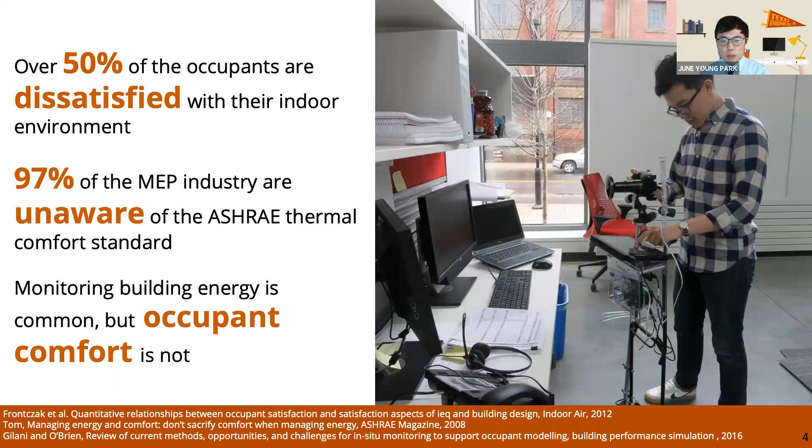But in fact, that's not always true. This is a photo from my research assistantship at Carnegie Mellon University. I traveled around US government buildings using IAQ sensing and interviewing people to evaluate their satisfaction with their buildings. No matter which building, what I learned is they always complain about their building systems and indoor environment quality. And that's absolutely true from other POE studies, from industry standards or technological points of view. The main reason is that humans are not in the control loop. Sometimes they deactivate the sensing system or the sensors are located in the wrong way. One example: they use static set points for everyone, even though everyone has different preference levels.

So my PhD dissertation tries to review the articles to understand why this kind of problem happened. I reviewed research articles from human behavior, comfort, and smart building control research during my first year of PhD.

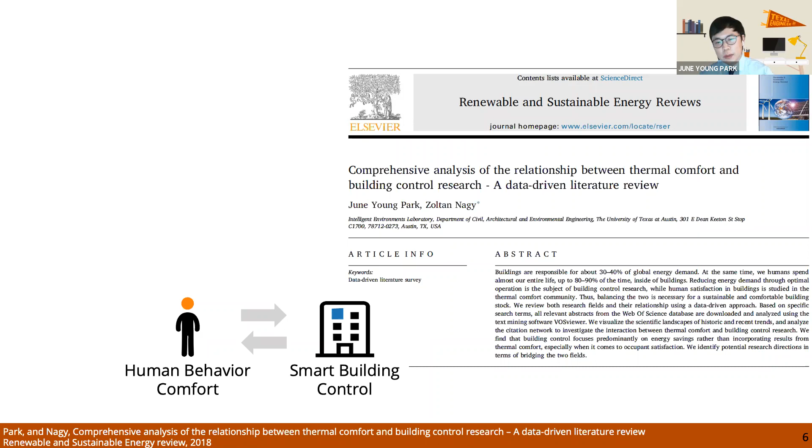Individually, both human behavior and comfort research, and smart building control research, show huge developments, especially after 2010. There are a lot of numerous papers published out there. So if there is knowledge transfer between the two, then there shouldn't be such problems as I identified before.

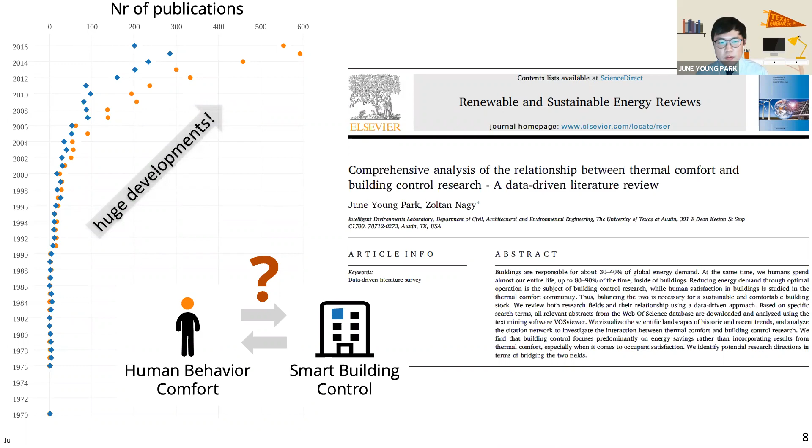So I tried to analyze the relationship between those two fields using a text mining technique. Each dot here represents how researchers use those scientific keywords in their scientific articles. And the distance between the two bubble dots represents how the two keywords co-occur in the same document.

Obviously, the keywords related to human comfort on the red side are far away from the keywords from smart building and building control research. That means they're not co-occurring in the same scientific article documents. That also means researchers from the smart building field, including me, are predominantly focusing on energy efficiency rather than thermal comfort or human comfort considerations.

So my PhD dissertation tries to link those two fields using some keywords. These keywords kind of hinted to me how I can tackle this problem, and they popped up in this bubble diagram as well. Context-wise, they are occupant adaptive behavior or indoor environment quality. Methodologically speaking, they are machine learning, intelligent controls, and environmental sensing.

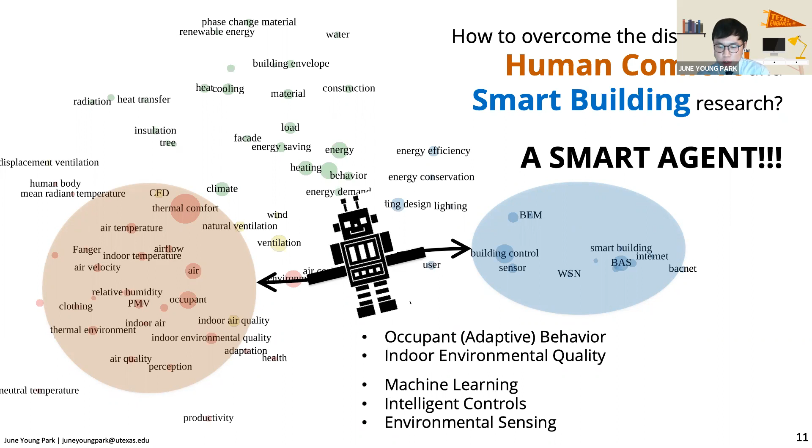So the prime example of this, the OCC agent, is occupant-centric building control, which is actively studied in IEA EBC Annex 79. Under this paradigm shift in building control, the OCC agent acquires data from occupants using indoor environment or human-building interaction devices, and updates the building control set point for building systems to provide comfort. The main objective here is balancing occupant comfort and energy efficiency, which is considered one of the grand challenges in building control and thermal comfort field.

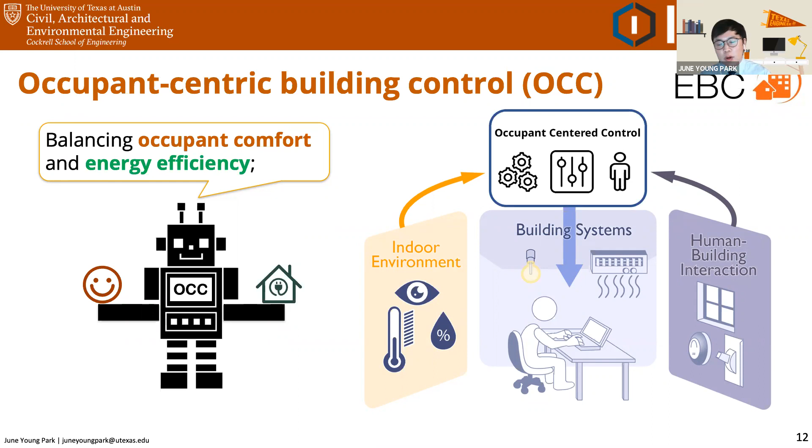So as part of Annex 79 subtask 4, we started to review OCC studies. Using keyword searching, we found that there are more than 120 papers on OCC studies. But in fact, there are only 42 field implementations in actual building systems, which indicates there are some practicability issues when we apply OCC to actual buildings. That requires easily deployable, doable OCC algorithms in actual building systems.

Among those 42 studies, 23 are occupancy-based controls, which identify occupants' presence or count the number of occupants and use that information for whole building systems control. There are also 19 occupant behavior-based controls, which identify different preference levels or occupant behavior patterns and use that knowledge to identify adaptive and personalized set points.

Among those 19, 13 are direct sensing of occupant comfort, using biological sensing or app-based questions about comfort. And 6 are indirect sensing, which just observe how people use their thermostat or light switches, analyzing diurnal patterns to identify the comfort boundary of each individual.

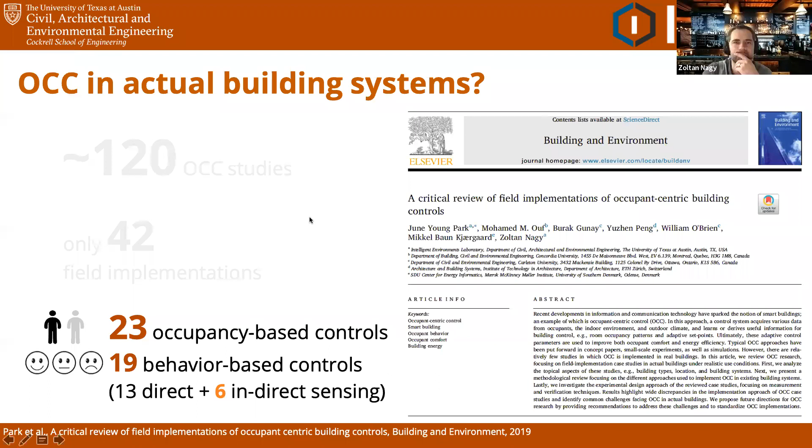Study 1 is related to occupancy-based control. The name is CRC-OOD. I'll detail the name later on, but I want to point out that this is a direct quote from Annex 79 subtask 2. I'm applying advanced data analytics on existing data sources to identify the fundamental knowledge between occupants and their mobile devices, which can be used for occupancy-based control.

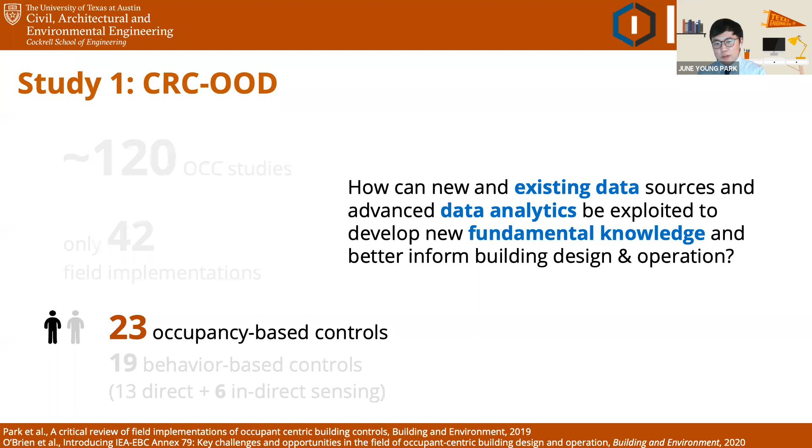Study 2 is RL-OCC, reinforcement learning-based occupant behavior-centric controls. This is also a direct quote from Annex 79, subtask 4. I'm going to develop building operations strategies using online learning methods to adapt to occupants and provide a comfortable environment using less energy.

Here are the contributions of this dissertation. The first, CRC-OOD, is capture and recapture based opportunistic occupancy detection—building a simple and accurate detection system using existing IT infrastructure data, inferring the number of occupants with minimal ground truth information, and identifying the fundamental relationship between occupants and their mobile devices. The second, RL-OCC, harnesses the complex dynamics of human-building interactions by observing diurnal patterns of people using building systems. It uses online learning to continuously adapt building systems to humans, ultimately balancing occupant comfort and energy saving efficiently.

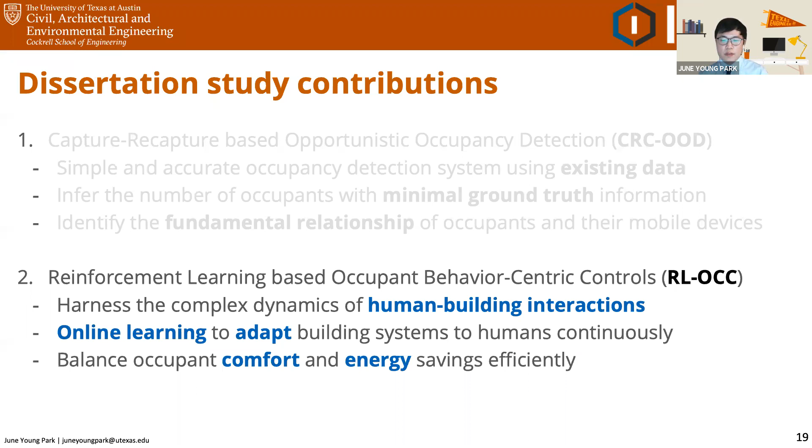Here's a graphical abstract of my studies, CRC-OOD and RL-OCC. CRC-OOD uses IT infrastructure to identify the fundamental relationship of occupants and their mobile devices using the capture and recapture technique, for more whole-building level analysis. On the other hand, RL-OCC is for closed office units, individual people, trying to understand their preferences or behavior, linked to lighting control, HVAC control, and the BAS system using reinforcement learning technique.

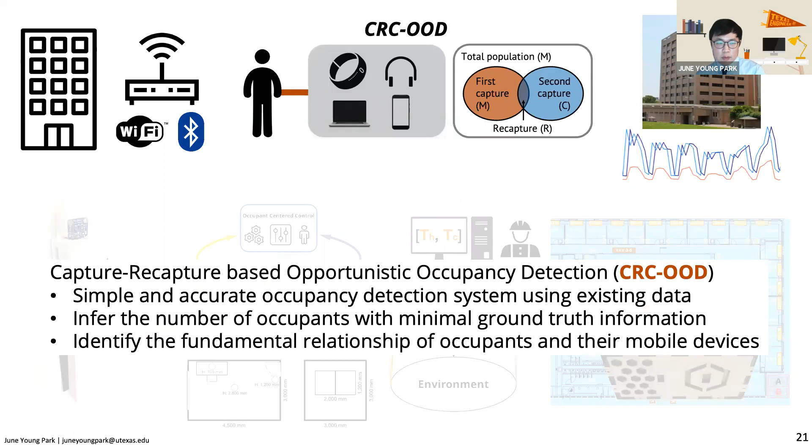So CRC-OOD—just reiterating my previous point—researchers these days use opportunistic occupant detection, meaning using existing data sources to infer occupancy or occupant counts. That's because people carry Wi-Fi or Bluetooth devices in their daily life patterns, and we have IT infrastructure to use that.

But there is a missing link behind this opportunistic occupancy detection. Most models researchers propose for occupancy-based control require a Y label, the number of people, to train the model in a supervised learning fashion. But to get this Y label data requires camera installation to count people, which has privacy issues, is expensive, and isn't doable for all buildings. It's also labor intensive by manual counting, and as time goes by, people have to recalibrate those labels to retrain the model again and again.

So instead, I was trying to infer the more fundamental relationship between people and their mobile devices, which is R here, mobile devices and N people.

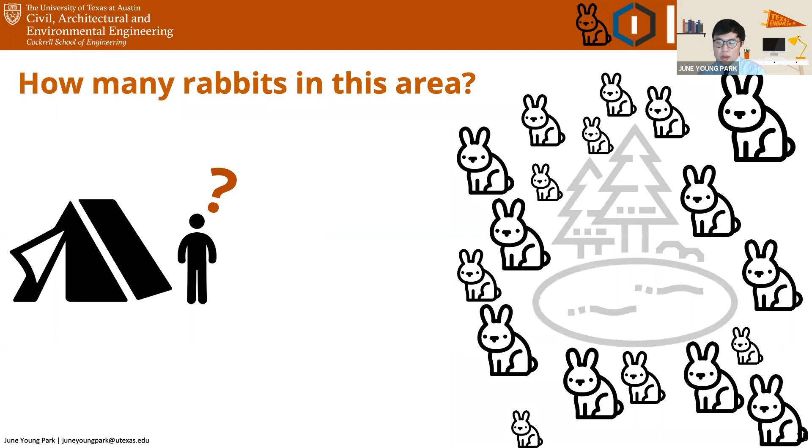Here I introduce one interesting method from ecology. When ecologists try to estimate the total population size of certain rabbits or certain species in an area, they use the capture and recapture estimator. It is an established method with a very long history.

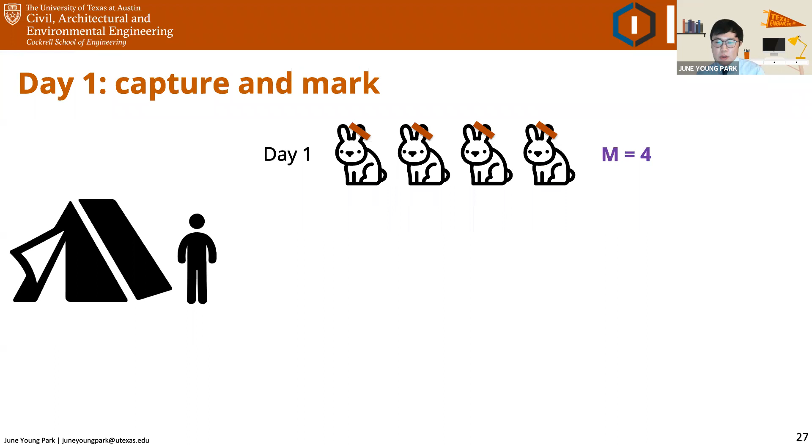One person goes into the area, counts the number of rabbits, marks their ears, and releases those rabbits on day 1. On day 2, they capture new rabbits, and among them 3 are actually recaptured from day 1. By analyzing those patterns of capture, recapture, and new capture—MCR—we can estimate the total number of rabbits from an ecology perspective.

We apply this technique to the building domain, especially for Wi-Fi and mobile devices. On day 1, we capture 3 mobile devices and store their MAC addresses, the unique identifier of each device. On day 2, we get 2 new devices, and just one device is recaptured from day 1. If we continue this to day N, we get a generalized format, the Schnabel index, to infer the total number of mobile devices in the building. If we divide this number by the whole registered population in the building, we can infer RCRC, the ratio we want to identify.

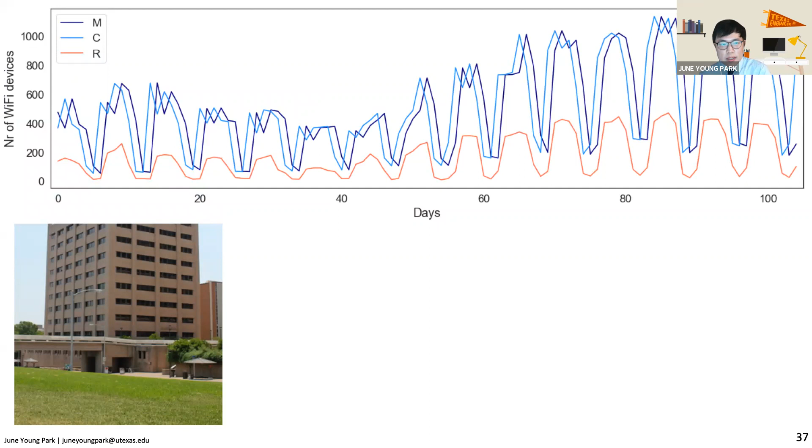We apply this CRC-OOD in actual buildings. This is the ECJ building, home of the CAEE department, with about 1,300 people registered. This shows 100 days of MCR patterns. Applying our technique, we identify 1.42 Wi-Fi devices per person.

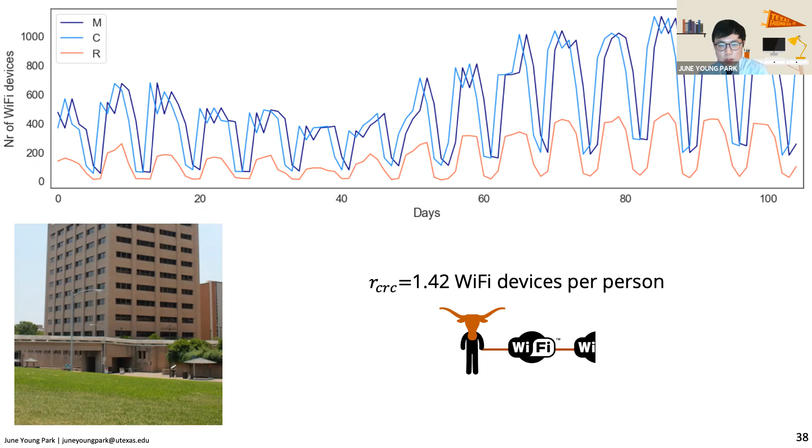We also apply this technique to other buildings. Every building has a different story in terms of MCR patterns, resulting in different R values. That means we cannot use a simple R value for every building, because each building contains different populations with different ratios of mobile devices. CRC-OOD can adaptively learn different R values based just on IT infrastructure data.

But one limitation was evaluating those numbers using ground truth data. So we used simulation to evaluate CRC-OOD in a simulated environment. In this case, there are 1,000 people, and we changed the R ratio—the ratio between people and mobile devices—from 0 to 3.

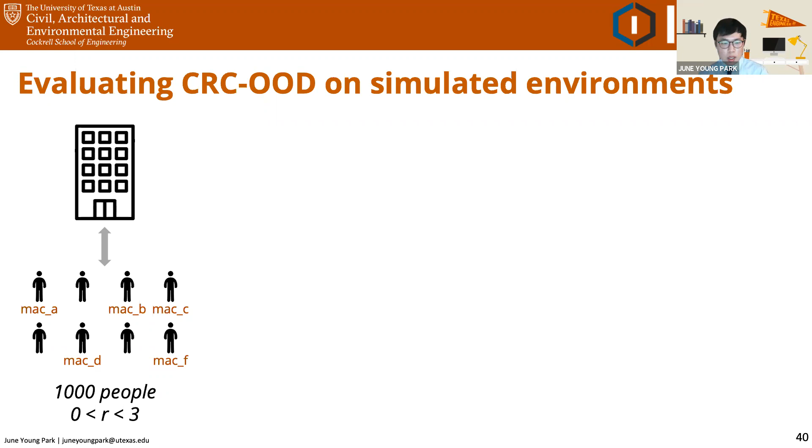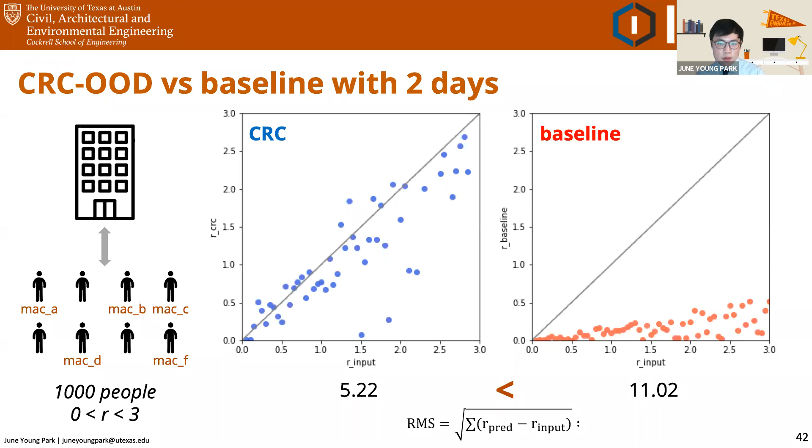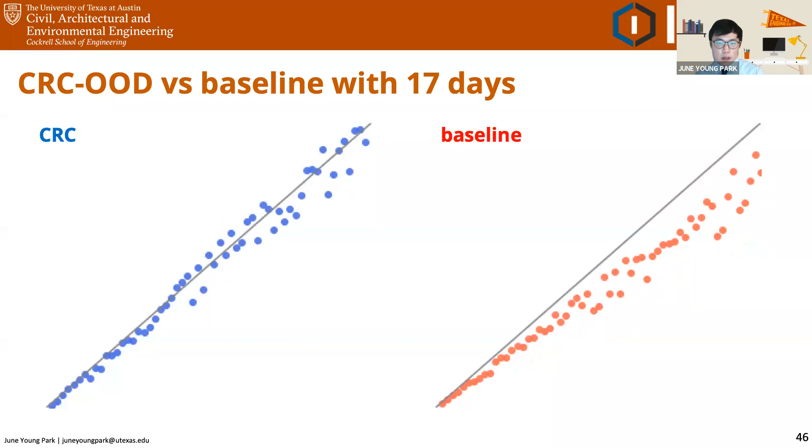Using just 2 days of CRC, the results are very close to the y equal x line, which is way better than baseline in terms of RMS rate. This is 2 days of CRC, 7 days of CRC getting close to the y equal x line, 12 days of CRC, and 17 days of CRC. So after just 1 week of CRC, the RMS rate of CRC-OOD is very small, and the baseline method requires almost 1 month to achieve the same accuracy as the CRC method.

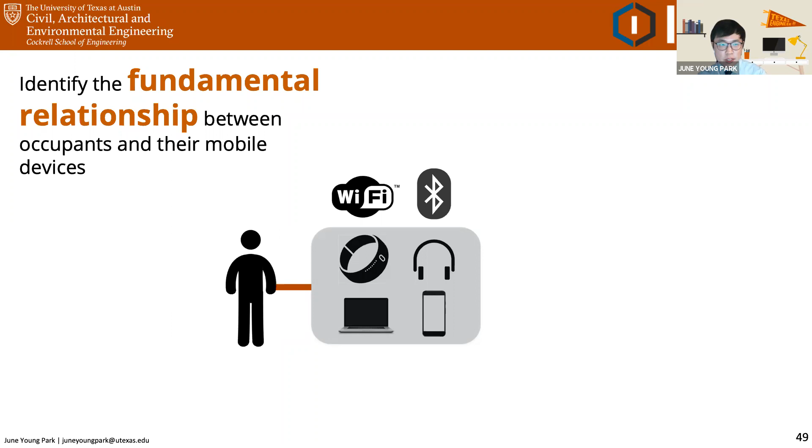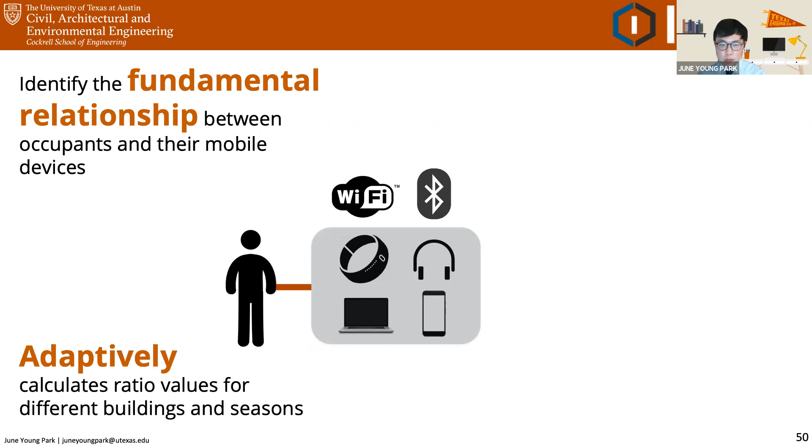So here's a summary of the CRC-OOD method. We identify the fundamental relationship between occupants and their mobile devices, which was simply assumed in other studies. We use the CRC technique to identify that, and it adaptively calculates different ratios for different environments. It uses existing IT infrastructure for large buildings with minimum ground truth information, and it's easily applicable just using IT infrastructure, so it can be used for demand-driven controls.

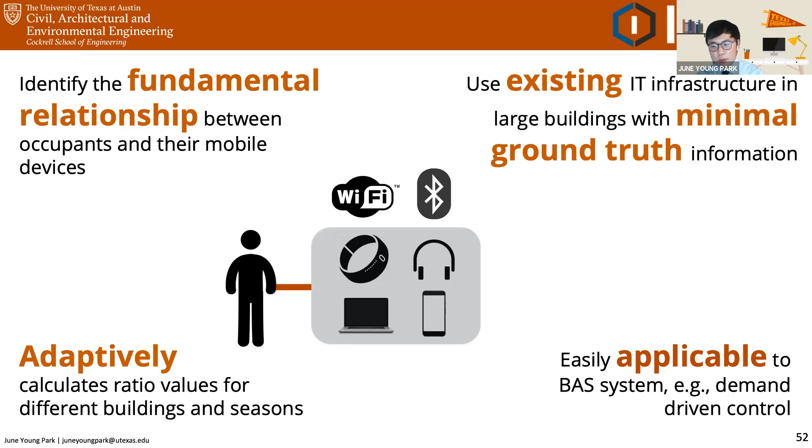So this is about my first study, CRC-OOD. In the second study, I want to reiterate my review result. As I mentioned earlier, there are 19 behavior-based control studies, 13 of them are direct sensing, and 6 of them are indirect sensing, so I want to focus on those 6 indirect sensing methods.

These analyze the diurnal patterns of how people use their building systems, for example how they use light switches or the thermostat, using online learning methods on that dataset to build occupant operation strategies to provide a comfortable environment using less energy.

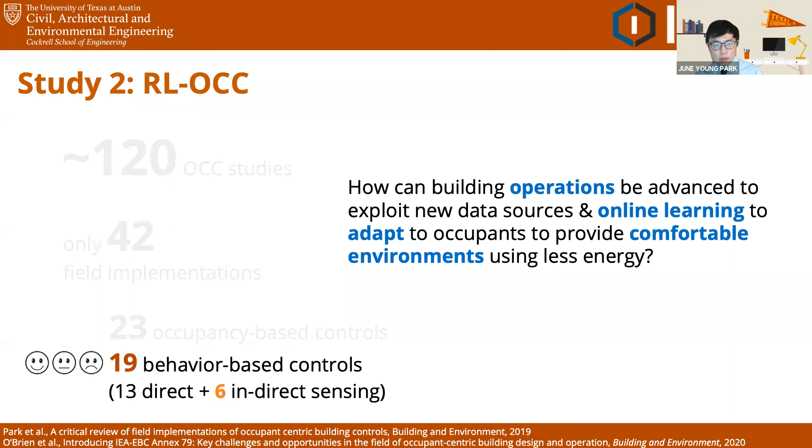And the first study I want to present here is LightLearn, which is RL-based occupant control for lighting.

As a learning component, I would like to introduce reinforcement learning. Reinforcement learning is formalized by Markov decision processes: an agent performs an action on the environment and gets a state and reward, and through trial and error via interaction, keeps iterating this loop, so the agent adapts to the environment. One great example for RL is AlphaGo. The Google DeepMind AlphaGo agent had no prior knowledge about the game of Go, but it just played with humans, and finally it learned the rules and beat the human champion.

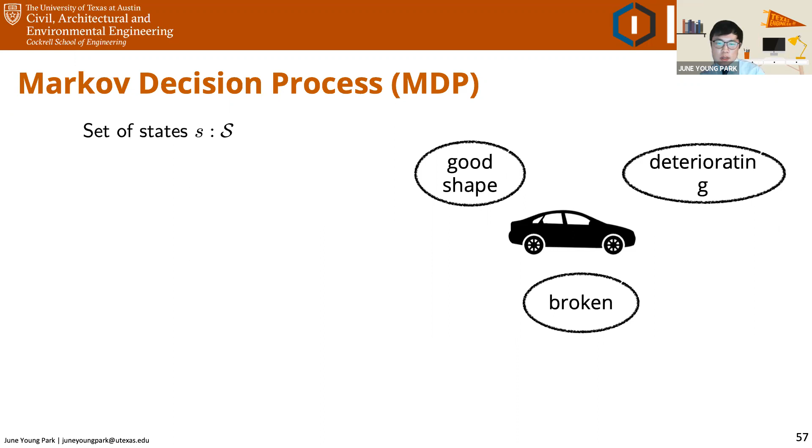Now, as I mentioned earlier, the core part of reinforcement learning is Markov decision processes, so I would like to spend some time explaining what an MDP is. Let's assume you have a car and you want to maintain it in good shape with minimal cost. You can define the car state as good shape, deteriorating, and broken.

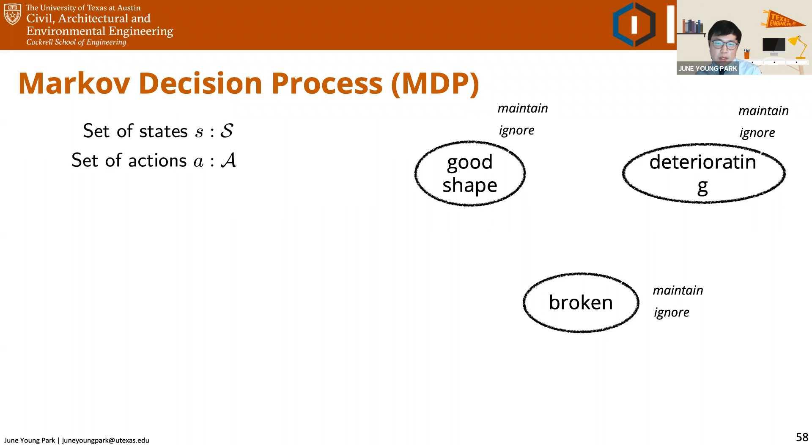Then you can have actions given that state: either go to the maintenance shop or just ignore the state. Each action given a state has some reward function, here spending some money. So if your car is in good shape and you go to the maintenance shop, you have to spend some money, but if you ignore it, you don't have to spend any money.

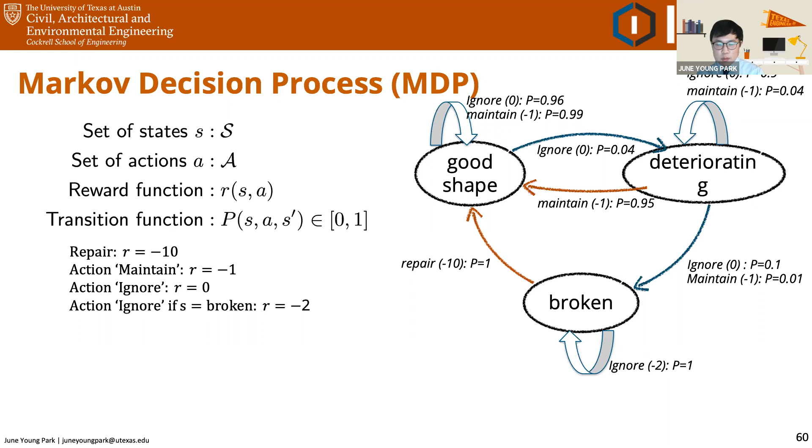But if your car is broken and you go to a maintenance or repair shop, you have to spend more money compared to going to the shop with a car in good shape. So those are reward functions. And there's a transition function between state, action, and next state, which is basically the probability of transitioning from state to state given an action.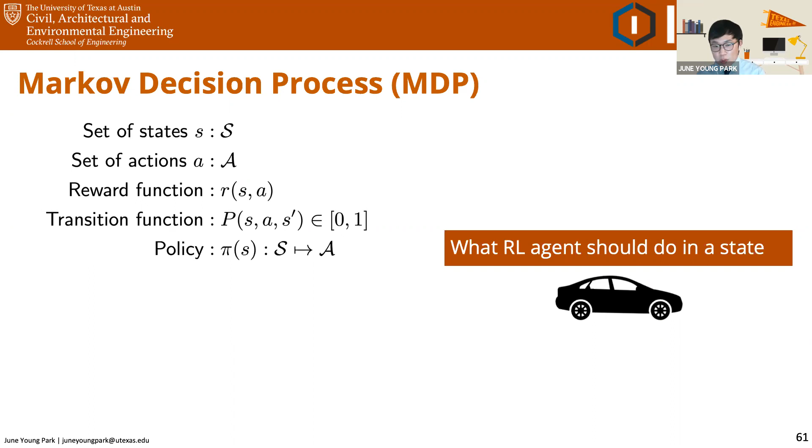So what the RL agent should do in this problem setting is try to find the policy, and follow the policy that maintains your car in good shape with minimal cost. The cost here is a value function, which is an expected future reward. So when we use this MDP technique in a building system, we need to define state, action, reward, and transition probability, and solve this MDP.

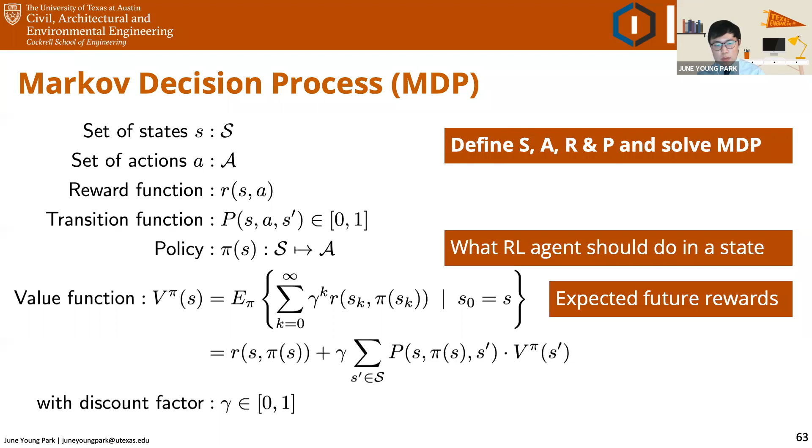So here's one example, LightLearn, an RL-based occupant control for lighting. People use their light switches as usual, and LightLearn adaptively learns adaptive set points for each individual and saves energy consumption.

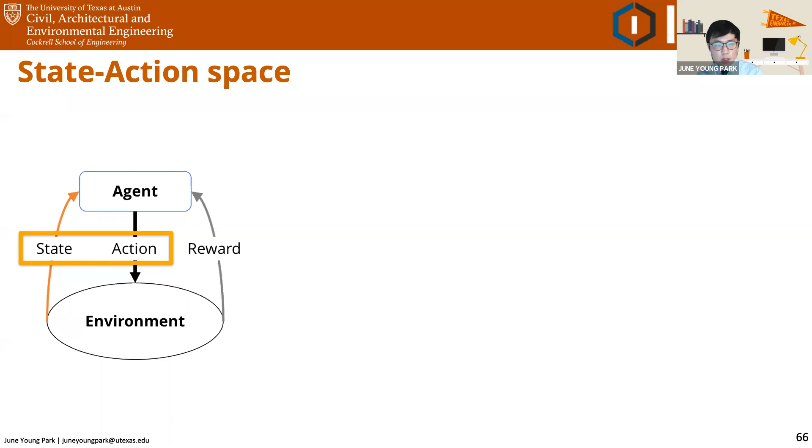So again, we have to define state, action, and reward for this LightLearn study. For the state-action space design, we first consider the occupancy of the room, tracking the Bluetooth signal of the room by detecting Bluetooth MAC addresses, so the room can be divided into occupied or non-occupied.

Then the second consideration is the switch position: on or off. The third consideration is indoor light levels, which from the occupant's perspective are dark, comfort, or bright. Having the combination of those three factors, we can divide our room into 7 different episodic states.

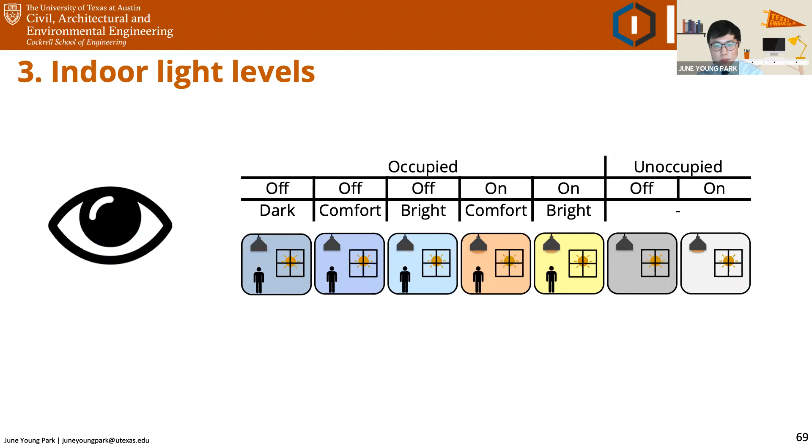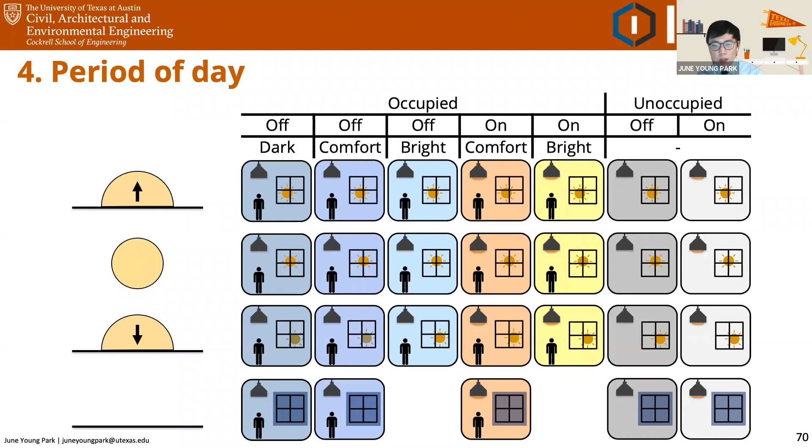The last consideration is period of day, which includes increasing daylight period, midday, decreasing daylight period, and no daylight at all. So we can now describe our one day with 26 different episodic states, so that we can calculate the transition probability between those 26 states and avoid the curse of dimensionality in this control problem.

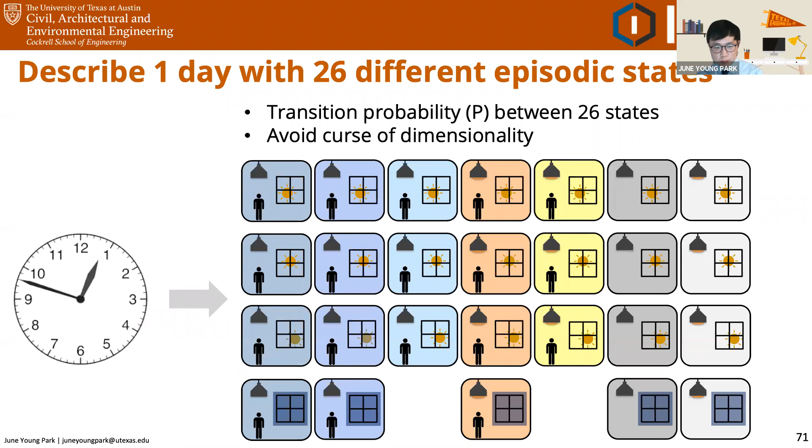We assign rewards for those episodic states: a negative penalty term when occupants are in discomfort or an energy-wasting situation, a neutral zero for energy consumption with comfort, and a positive reward for occupant comfort combined with energy saving.

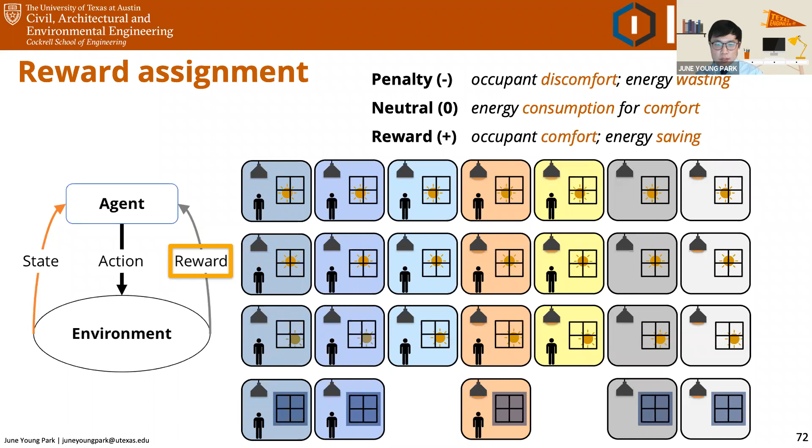The last component is the knowledge that LightLearn needs to operate. Once we gather data related to state, action, and reward every midnight, the LightLearn agent calculates the control law using the value iteration method, which is part of dynamic programming, until it finds a good enough policy. Policy here means a control law for LightLearn's operation.

Here's an example of how LightLearn works during the day. There's a physical room environment, which can be defined by occupancy, switch position, and indoor light level. And there's a cyber system that represents how LightLearn understands this physical environment.

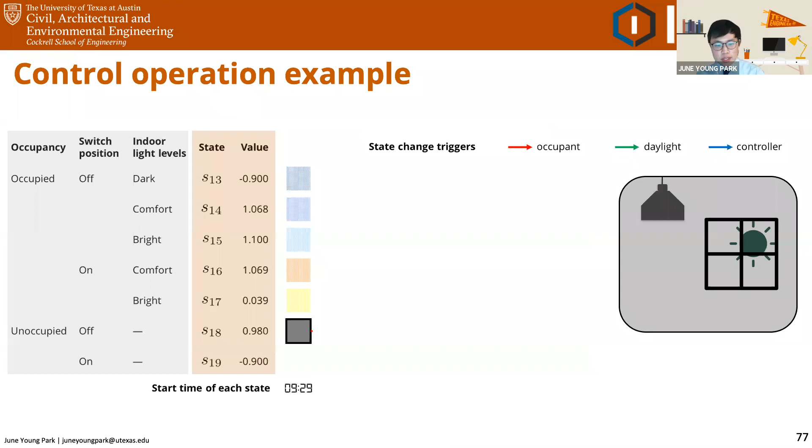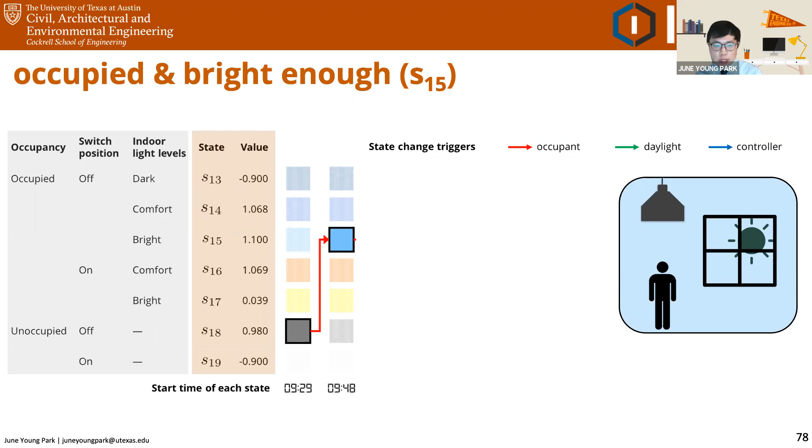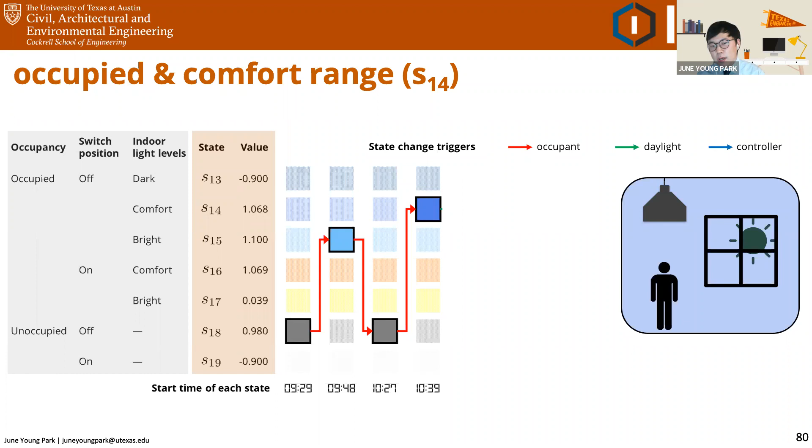Here's a control operation example. At 9:48, occupants enter the room, and it was bright enough, so it enters the S15 state. The value was a max value, so LightLearn doesn't need to do anything. The occupant left the room again at 10:27, and re-entered at 10:39. LightLearn understands that situation as the S14 state. Given S14, what LightLearn can do is wait for S15 state or turn on the light to go to S17 state. But since S15 has a higher value, it just waits for the daylight condition.

However, due to uncertainty like cloud cover outside, it goes to the dark condition, so it enters S13 state. Given S13, LightLearn can either turn on the light to go to S16 state, or wait for daylight to go to S14 state. But S16 is slightly higher than S14, so it immediately turns on the light and goes to S16 state.

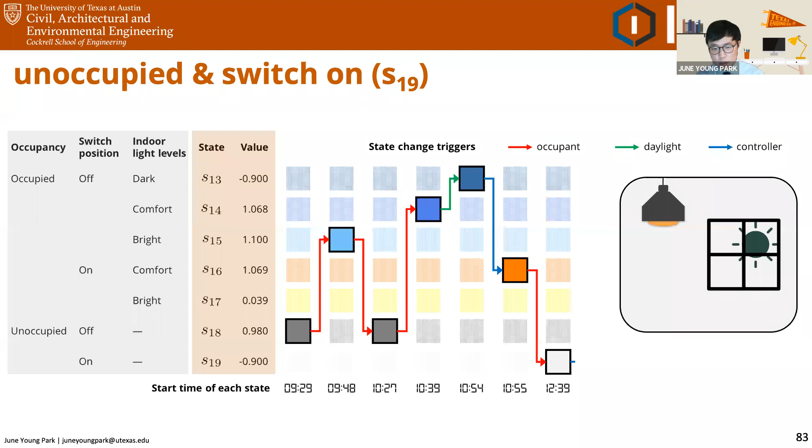The occupant left the room at 12:39 without turning off the light, so it goes to S19 state, which has a value of minus 0.9. So it immediately turns off the light and goes to S18 state, which has a value of 0.98.

So here's the whole day's operation. LightLearn turns the light on or off to give occupants comfort while trying to save energy. But from LightLearn's perspective, it's actually just finding the optimal path for maximum cumulative reward by playing a switching on-or-off game.

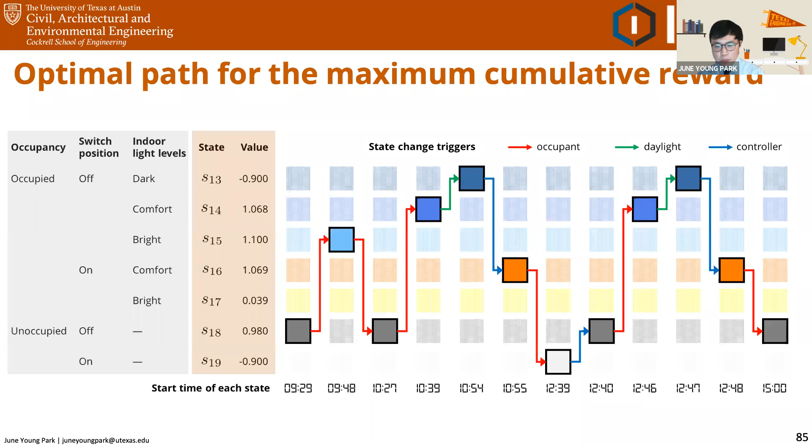We implemented this LightLearn study in an actual building system - again in our home department, the ECJ building. The main question here is, does LightLearn save energy and learn adaptively for different occupants? And how do people think about this new technology - what is their perception of it? So we chose 5 different offices with 5 different occupants intentionally, to see how LightLearn can adaptively learn different things.

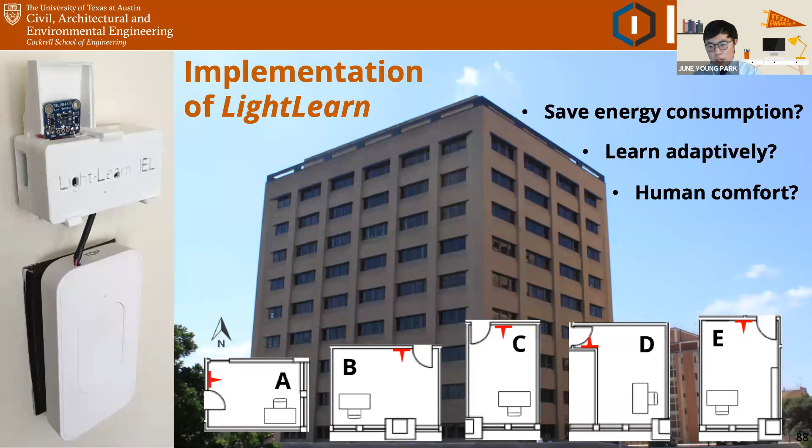First, LightLearn can save energy compared to two other scenarios. One is full operation, assuming the light is turned on from 9 a.m. to 5 p.m., which is the worst case scenario. The other is occupancy-based control, using PIR data to turn on the light when an occupant occupies the room. Interestingly, LightLearn identified some energy saving potential compared to occupancy-based control.

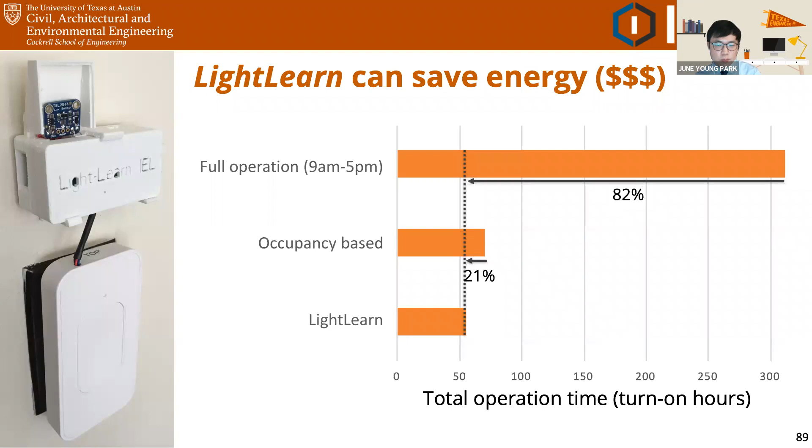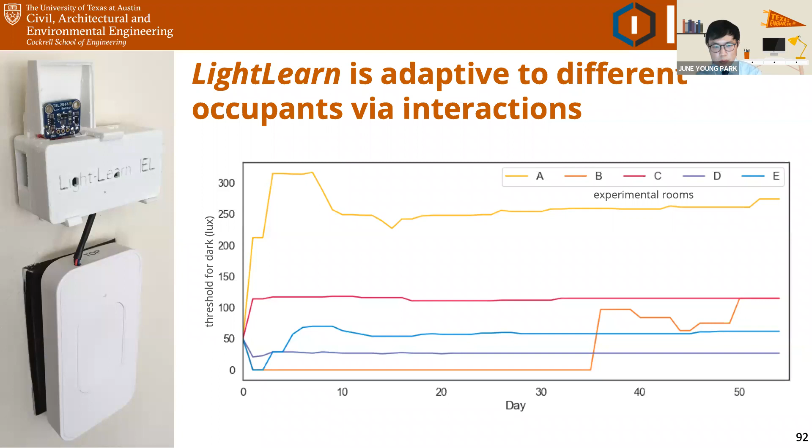We also asked how people think about LightLearn - this is about their perspective. They like some automation in their buildings, and they like having a personalized agent that tries to learn for themselves.

We also asked about the dislikes regarding LightLearn, and the majority of complaints were about the automatic lights-off action. The main concern of people was that they didn't know why the automatic lights-off action happened.

That is because we intentionally chose this way to try to avoid the bias setting of our experiment. So we didn't explain anything about our LightLearn operation, but people might think somebody is taking off their opportunity to turn lighting on or off.

So one future research direction from this finding is how much information we have to open, or how to interact between occupants and their building systems. How can a smart building agent use an interface device to explain the control action decisions? One example is a building avatar to explain everything, or another example is just an LED signal, like 'now you save energy and your light level, even though I'm turning off the light, your light level is enough based on your historical data set,' something like that.

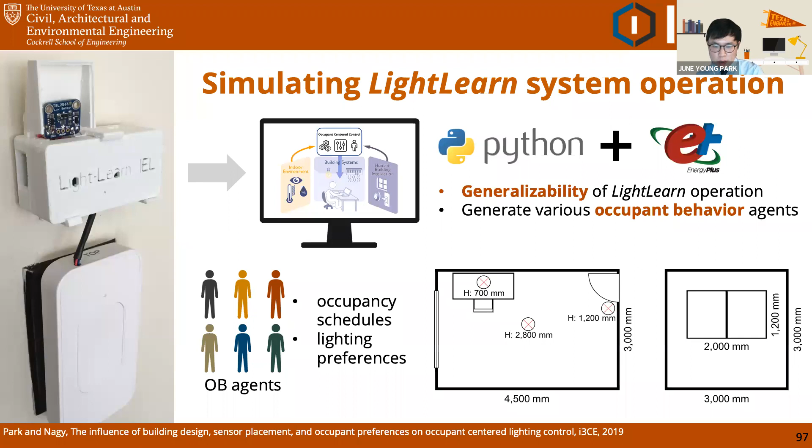So the next question is, what if we install this device in a different location or for a longer period? So we use Python EnergyPlus based simulation to test the generalizability of the LightLearn operation, generating various occupant behavior agents. We model a typical closed office unit in the United States and generate different OB agents using different occupancy schedules and lighting preferences.

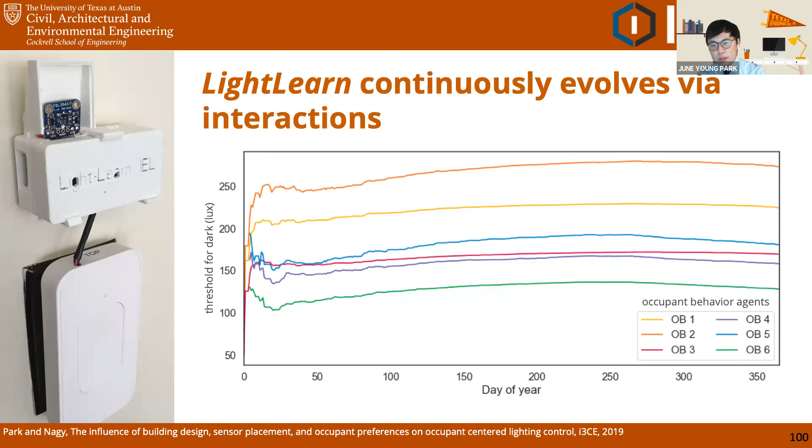So the next thing is applying RL-OCC for the HVACLearn system. Here's HVACLearn. In this case, we're more focused on how to integrate this RL-OCC with facility managers and using the BAS data.

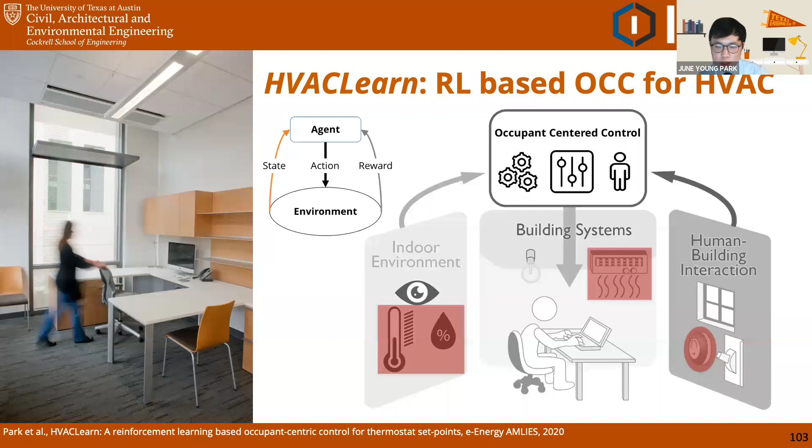Again, we use the reinforcement learning technique to tackle this problem. Similarly, we track the thermal environment, for example indoor air temperature and humidity level, and how people use their thermostat or how people use the switch box I just showed, and use that data to update the new set point for the building systems.

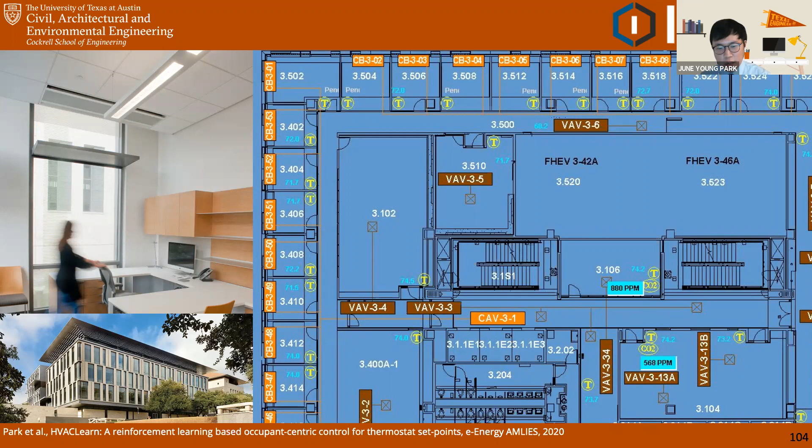And we plan to test this algorithm in one of the buildings on the UT Austin campus. But when we discussed this project with the facility managers group, one of their concerns was that they want to know everyone's preference level, but given that there are more than 100 buildings on the UT Austin campus, and each building has more than 100 people, it is almost impossible to understand each individual's preference level efficiently.

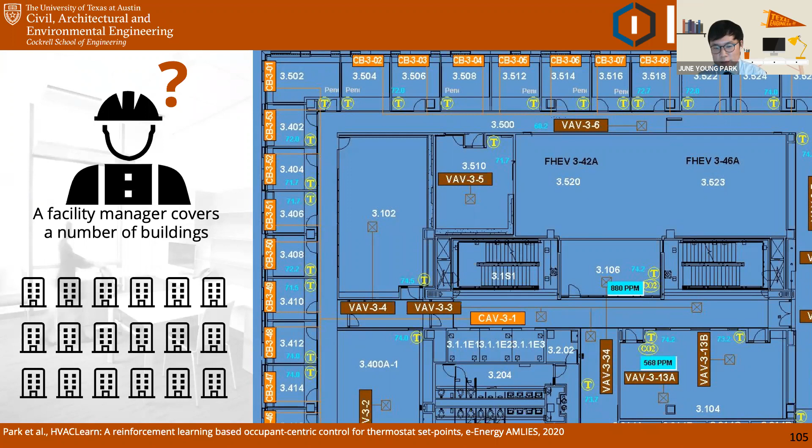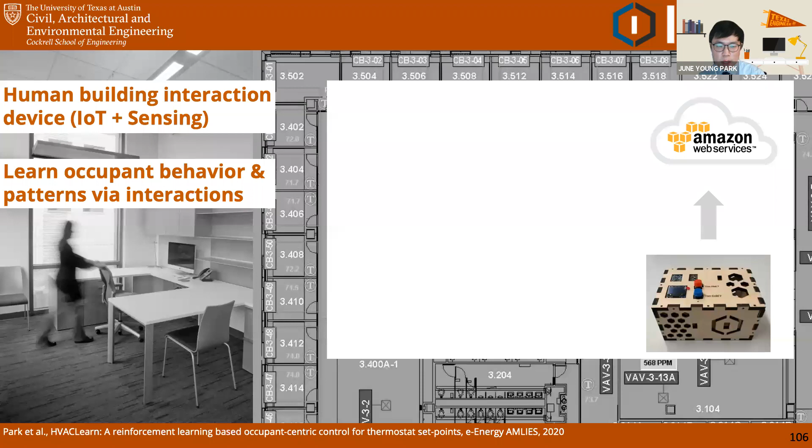So it's almost impossible to know individual preferences just by complaint logs. So what we proposed to them was to build a human-building interaction device, this small switch box, HVACLearn, and then try to learn occupant behavior and patterns of their interactions to assist the facility managers in understanding occupants more efficiently and robustly. Ultimately, this will balance occupant comfort and energy efficiency as well.

So this is literally a human-in-the-loop approach, not only occupants themselves, but also the facility managers group on our campus. Because researchers who study AI for building systems, like me, have to put facility managers inside this loop, because they are the most knowledgeable people who understand building systems. They might do some quality checks beforehand. So full automation using AI is not an ideal solution, but AI should be an assistant tool for facility managers for this OCC problem setting.

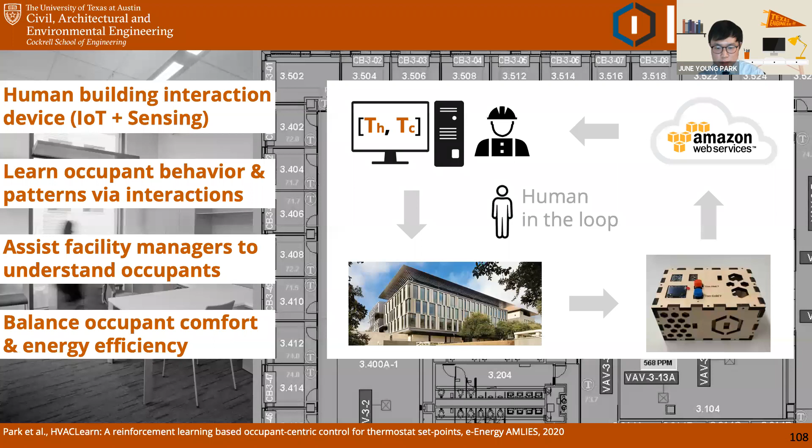So again, we have to define state, action, and reward for this problem as well. One primary assumption we made here is that occupants indicate their discomfort either by pushing one of two buttons, too hot and too cold, or by changing their thermostats. So we monitor indoor air temperature when they press the buttons or when they change their thermostats.

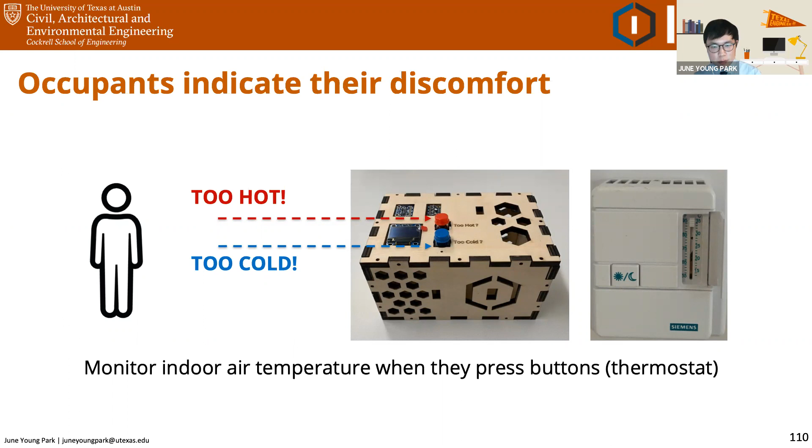And then using those T cold and T hot temperatures, which are cumulative learning throughout the experimental period, we identified certain days' state as cold, neutral, or hot. So if the occupant occupied the room for the majority of their time at a temperature less than T cold, then that day's state was the cold state. If in between T cold and T hot, it's neutral, and if hotter than T hot, then it's a hot state.

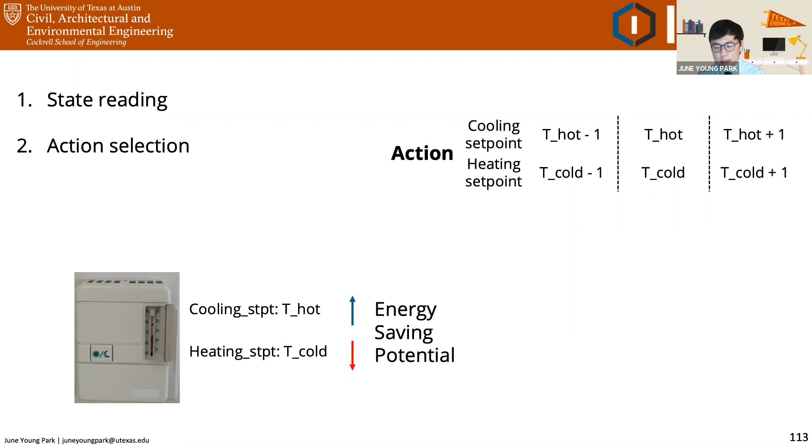The next thing is action selection. For the action selection, we apply the T hot temperature for the cooling set point and the T cold temperature for the heating set point. But one thing we have to keep in mind is if we increase the cooling set point and decrease the heating set point, we'll have some energy saving potential by increasing that deadband. And if we decrease the deadband, there will be better comfort potential. That is why we consider T hot minus 1, T cold minus 1, T cold plus 1, and T hot plus 1 as our action selections.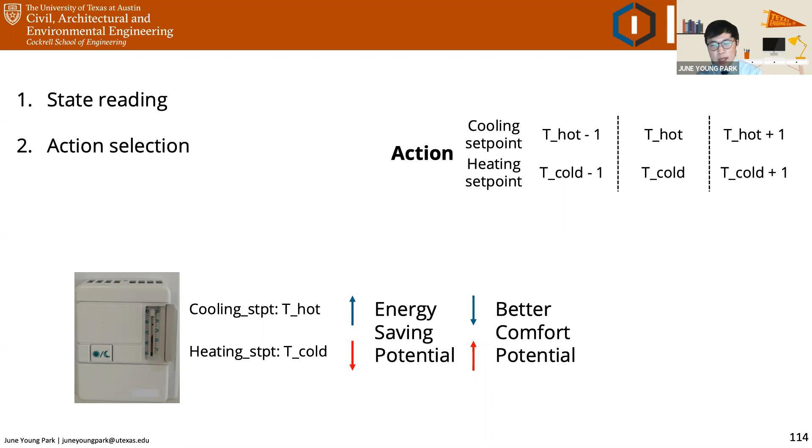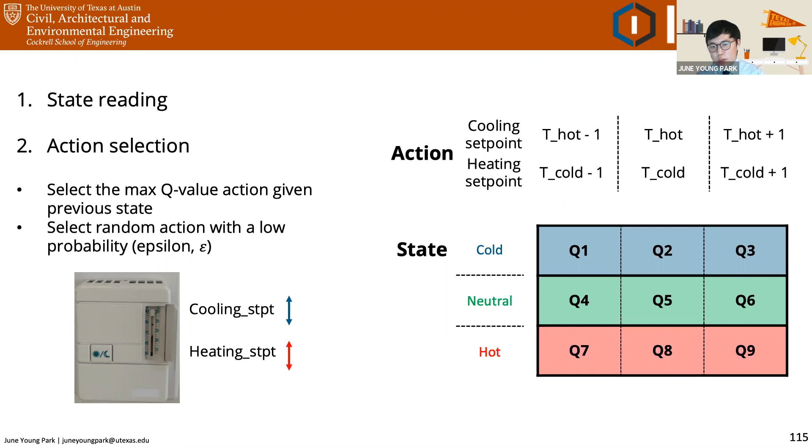Given 3 actions and 3 states, we now have 9 different Q values for each state, for each controller. So the controller selects the max Q value action given the previous state at every midnight. And to have some exploration opportunity, we select a random action with a low probability value, which we use as 5% in this scenario.

The third thing is reward calculation. Reward here means how many times people push their too hot or too cold button, but we put some scaling factor, which is EF. If it increases the deadband of the cooling set point and heating set point, then we scale it down less than 1 to attenuate those number of button presses. For other actions, EF is considered as 1.

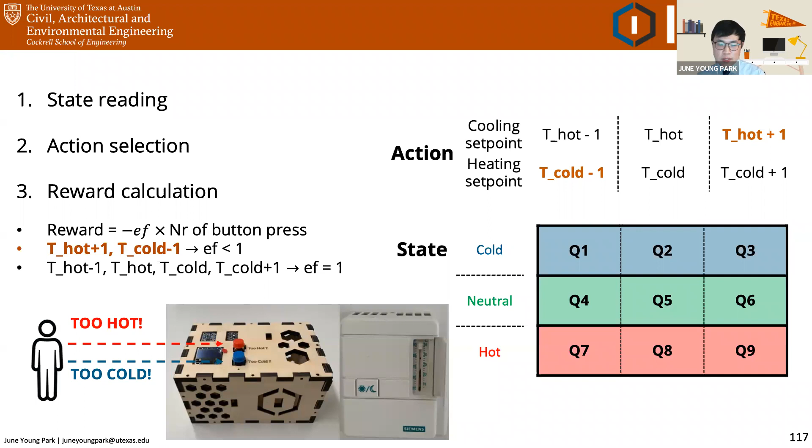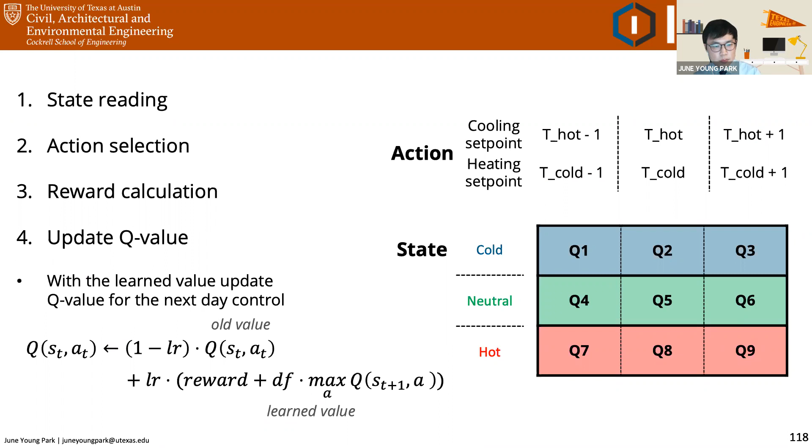The fourth step is update the Q values based on the reward value that they received. And we iterate steps 1 to 4 every midnight, every daily pattern, to try to adapt the Q values for different people and different indoor environments.

Our plan was 20 experimental groups and 20 control groups, and we actually installed these devices. It was planned for a long-term study for spring and summer 2020, and integration of HVAC-Learn into BAS and FM. But due to the COVID situation and shelter-in-place order, we cannot get...

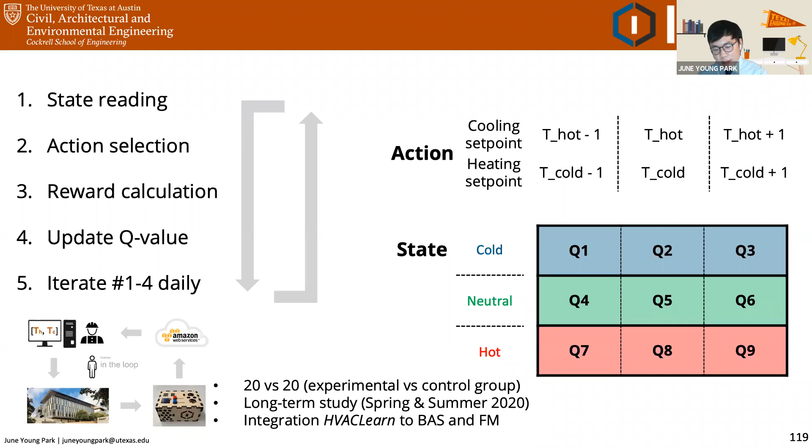Enough data for this control. So instead, we tried to simulate HVAC-Learn performance using EnergyPlus. We scripted the HVAC-Learn algorithm using the energy management system in EnergyPlus, and also scripted 2 different occupant behavior models: one is occupancy and the other is thermal vote.

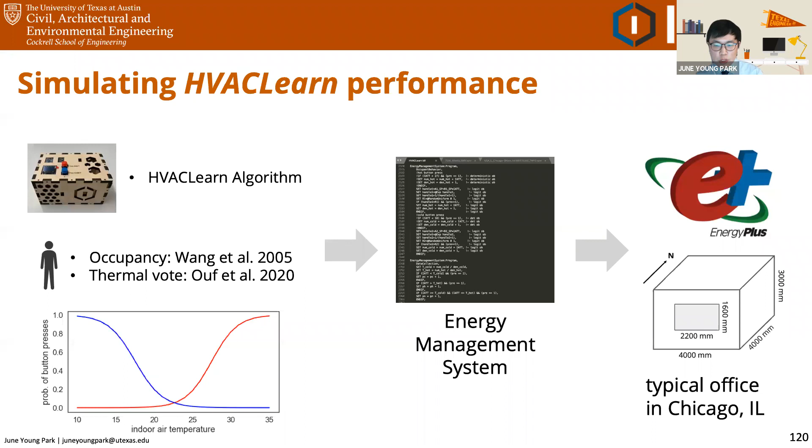Occupancy here means the binary numbers of 0 or 1, occupied or room unoccupied, for the closed office unit. And thermal vote is the probability of button presses or changing the thermostat given indoor air temperature. We simulate this HVAC-Learn approach in a typical office in Chicago, Illinois.

Here are the results compared to reference control. Reference control here means the static set point, which is 20 to 25 for heating and cooling set point. You can see HVAC-Learn's daily discomfort hour is a lot less than reference control, but cooling energy is slightly less or almost the same.

On the other hand, for heating control, the discomfort hour is almost identical, but heating energy is a lot less. There's a too-cold button count as well. As you can see, there are almost double the number of too-cold button presses during January and February, but by the end of the year, November and December, it's almost halved.

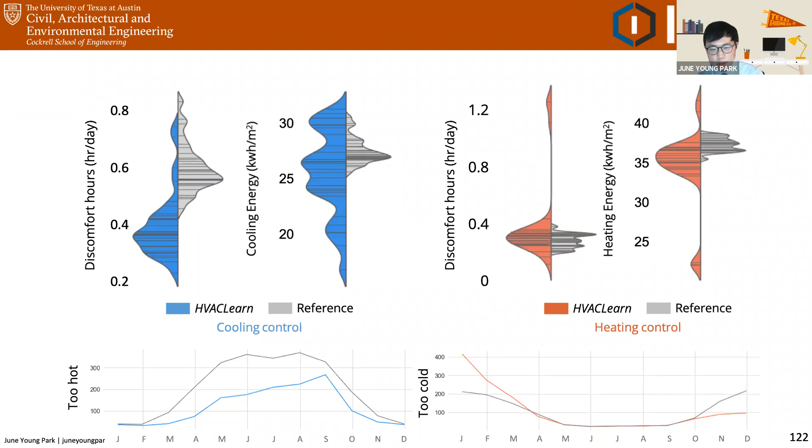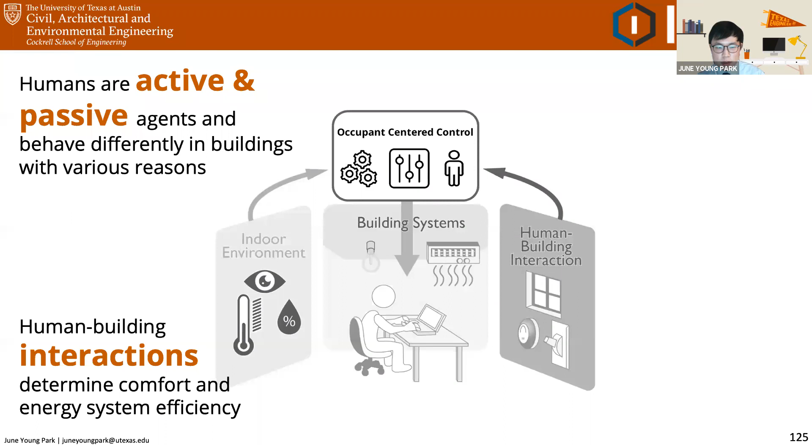Here's a summary of RL-OCC. As you can see, humans are active and passive agents in buildings, and human-building interaction determines comfort and energy system efficiency. RL-OCC efficiently balances occupant comfort and energy efficiency, and reinforcement learning specifically learns different occupants in the indoor environment.

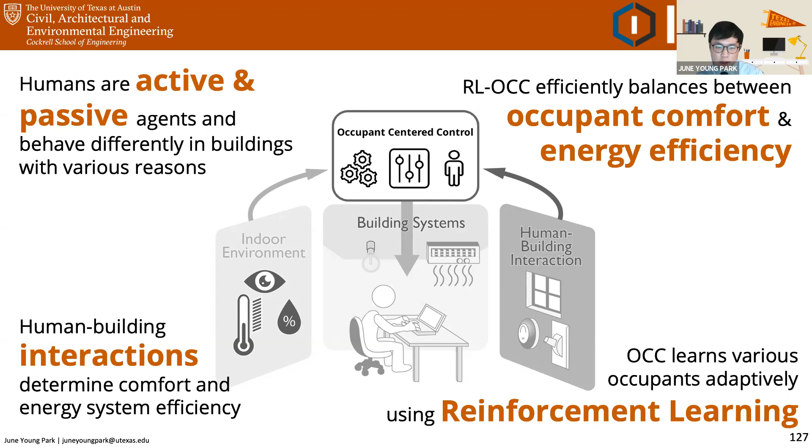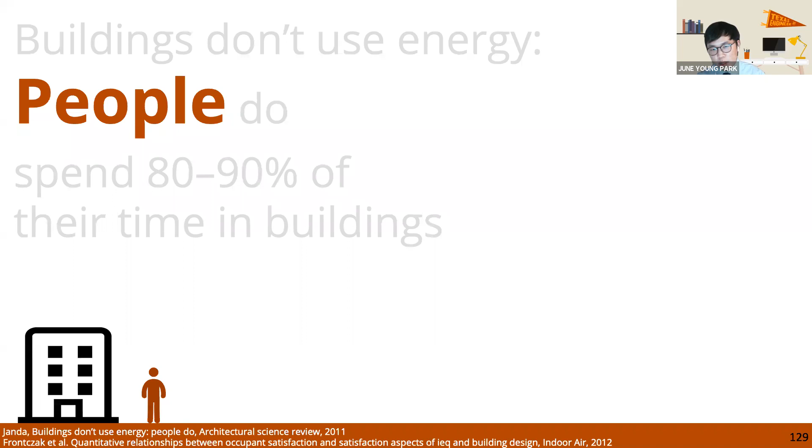To conclude, let's go back to my original statement: we have problems related to energy and comfort. I propose that OCC can be a viable solution to tackle this problem. Especially, CRC-OOD can identify the fundamental knowledge of occupants and mobile devices, and RL-OCC can efficiently balance between occupant comfort and energy efficiency.

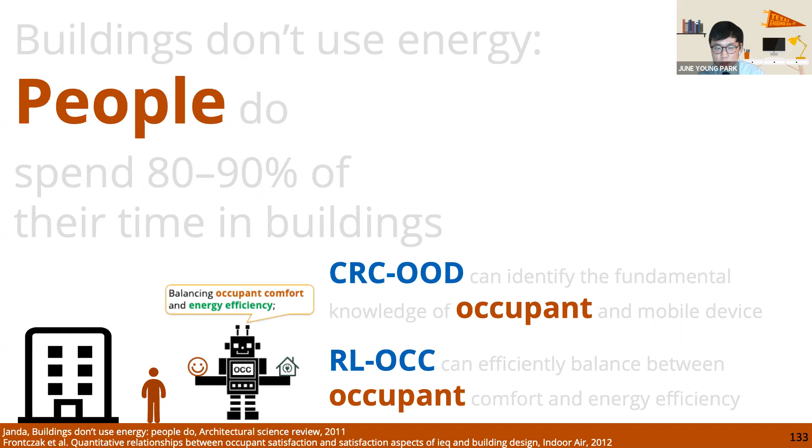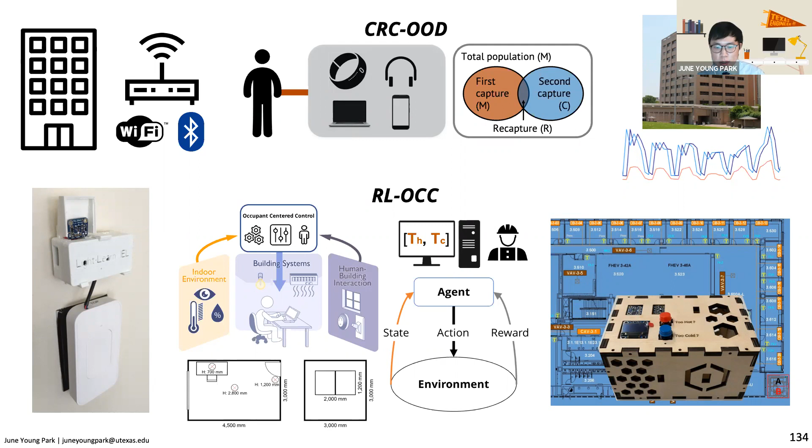Both approaches are actually aimed at people, which is an occupant-centric approach. They use existing data sources, new data sources, or minimum installation of data sources, and advanced analytics like capture and recapture and reinforcement learning, applying them to individual building control and whole building control systems as well.